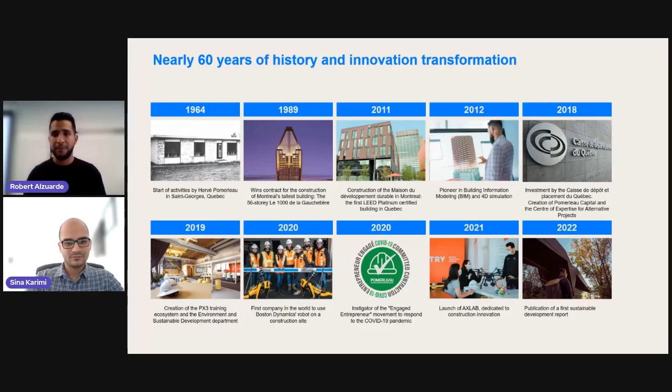Just to give you some metrics: we have around 200 active sites across Canada, 4,000 employees, and around 20,000 people working on our sites. That's why it's so important to have a positive impact and to build those teams as we approach projects.

Presence across Canada, as you can see, with offices not only in Quebec but also in Ontario and BC.

Our expertise is, as you know, buildings, also civil and infrastructure, but we're also proud of our expertise in construction innovation. This happens by organizing 8 different research and development axes, going from artificial intelligence to Internet of Things, planning, reality capture, prefabrication, and obviously robotics, which is also part of the reality capture axis, discussed in one of these series before.

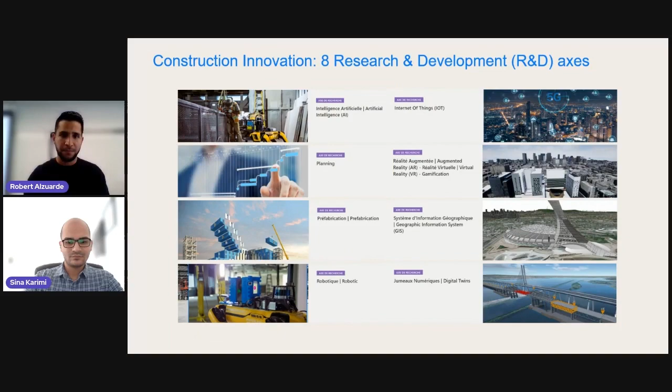Now, this innovation and all these different topics, they have a really unique approach. If we consider the size of the innovation team, we're talking about more than 100 people dedicated to do R&D, BIM implementation, framework analysis. But the implementation is not limited to those people. The innovation happens hand by hand with the operation teams.

So we divide now our framework in 2 parts. The R&D, it's led by the new acceleration lab, and then we have a team that is focused on the deployment. This team we call the Foundation for Operational Excellence. This is where we really structure how things are going to be applied on projects and how we can scale those benefits.

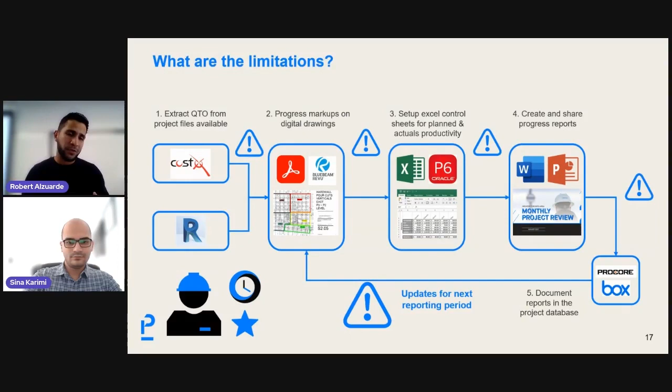Then you also have a disconnection with that master Excel database, and the reporting part is just a nightmare to really update, and not only does it take a long time to do that, but it also reduces maybe the quality of that process over time.

Now, is there a better way? That was the question that we put on the table when we started talking about this. Is there a way to really reduce the number of platforms, reduce those silos of content and unconnected data, and have just one database that merges all this information and one reporting tool.

That is not only able to report, but is also able to use some analytics and smart data connections. So we approached this by exploring some of the mature technologies available in the market. One of them is Assemble, and the other one is Power BI.

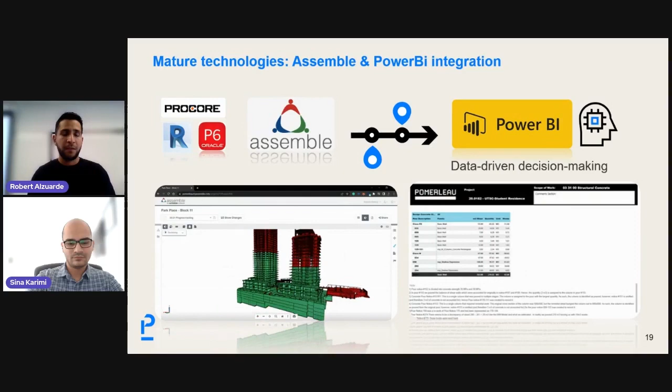With Assemble, we were able to connect the data coming from the BIM models, from P6, and even some data from Procore, like crew sizes and crew logs. So that data is now centralized in one place, and the reporting part is just a matter of extracting and selecting different data sets and organizing them in a way that enables data-driven decision making.

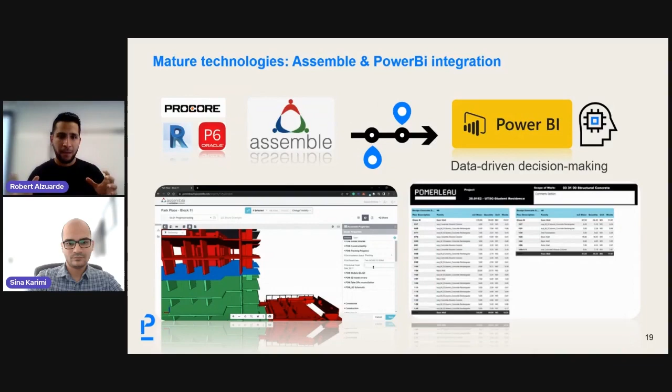So that's the path we followed to start deploying this initiative. In terms of deployment, we'll refer now to the project we're going to present today. We actually used this strategy in four projects in parallel as an initial pilot phase, because we wanted to compare similarities, but also differences between these projects.

The University of Toronto Student Residence is a design-build project. It's also a passive house project, which will be one of the most energy efficient buildings in Canada. It's around 25,000 square meters of surface area, and it's going to host 746 units for students at the University of Toronto Scarborough campus.

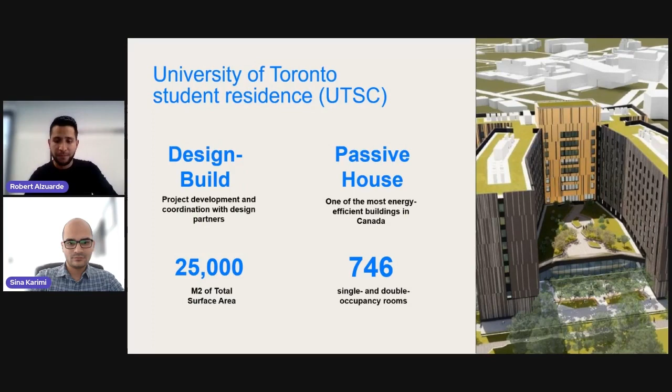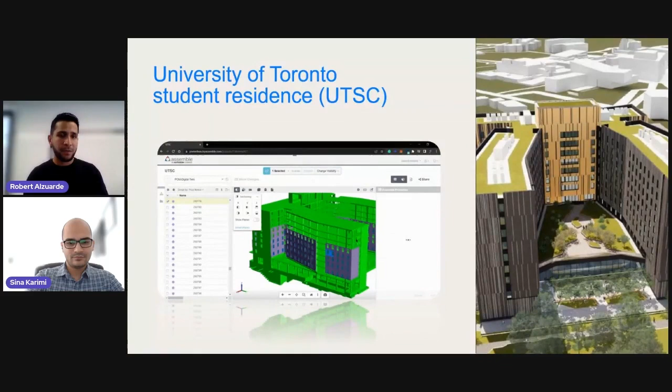With a project of this nature, we had many opportunities to explore how we can really provide this one platform and analytics tools to enable decision making and open new possibilities for the management of the project.

So I'm going to describe three specific uses of the DPT, digital progress tracking process. One is productivity tracking. The second is to understand the implications and effects of manpower. The third is about exploring not only productivity in terms of time, but also in terms of cost and conversion to unit prices.

For the first part, productivity tracking, we had a solution for taking a BIM model meant for design purposes, with a breakdown based on elements and families and typical Revit structure. We're now able to add and condition this model with information about the master format, division code, and the P6 activity IDs related to the elements in the model.

That is the first step, the key step, so we can start mapping the work breakdown structure, which is different in design versus construction. The second part of this equation is to have on-site installation status inputs from the team members, mainly the installation status and the completion date.

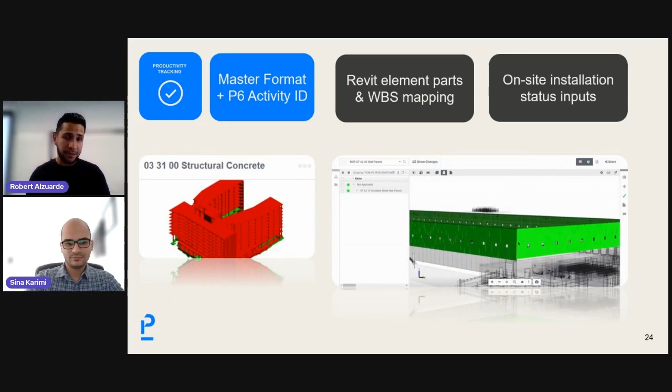That was the main step, the first approach. So we now had models that are split with master format codes, but we also wanted to understand the implications, as I mentioned before, about crew sizes.

With Power BI, we can also start linking and reading information available through Procore, and by having the number of hours each subcontractor registers on our projects, we can understand the curves of crew sizes, when that curve is increasing or decreasing, because they're almost done with their scope of work.

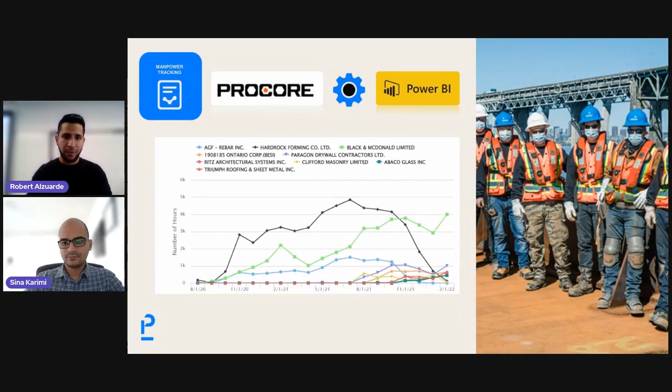With the two combined, we can really enable new potential for project managers and directors to understand the relationship between productivity and manpower. What you see there is one of the many different graphs and analyses we started to explore and extract from linking the models for this project with the data we wanted to add.

So here you can see two curves: one about productivity and one about crew size analysis. As you can see, they have a correlation, and this is not historical data used just to confirm and make it obvious that crew size affects productivity.

It's also a solution that can let you identify early flags, concerns, and problems, and this is exactly what happened in this project. I have many quotes and feedback from the actual project managers and directors, but let me just read some of them.

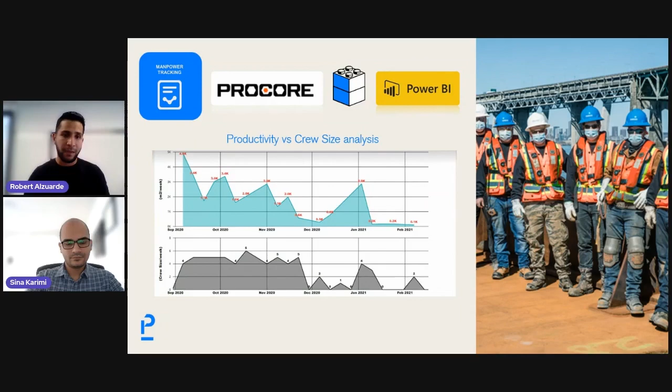By having these curves, we're able to increase and decrease the crew as required to ensure that we are still maintaining a schedule during the same month that we're working in. So right now, every project that has this process in place can make those decisions and identify those early flags. You don't have to wait until the productivity is too low to call the subcontractor and say, hey, we need to increase the crew size, we need to work on weekends. You can have this big picture and comprehensive picture of what's happening in the projects by merging the BIM data and the progress tracking data.

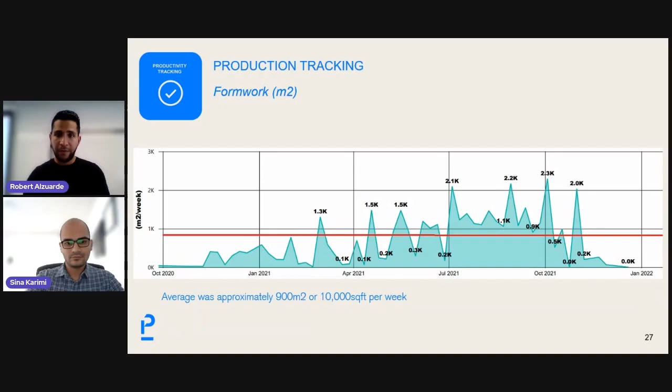Another example here of the value of these two projects. We have, in this case, formwork. I'm tracking the production of the formwork. So now we can see what is the average and how that average is also affected by productivity in terms of hours per square meter.

This is also a correlation, but in this case it's opposite. The higher the number, that means there is more hours spent completing the same scope of work. As we went through the initial levels of the building, like the foundations, we started to reduce the number. We started to be more efficient, and we were able to get these records not only for this project, but now we start thinking about a database of projects, how we can use this productivity for similar projects.

Hopefully that's a clear example. This one is also another approach of how we can use the data from the models to compare plan productivities from a baseline schedule, updated schedule, and the actual productivity.

The three curves that you see there, the gray one is for the plan. The baseline schedule had some deadlines to complete certain quantities of the structural concrete. The blue cyan curve shows the actual, and because there were changes and COVID affectations for this project, there was a revised schedule that you can compare with the actuals. So instead of trying to gather data from markups, PDF, or Excel tables, now you have the data linked and giving you the information you need to ensure the project is on track and on schedule.

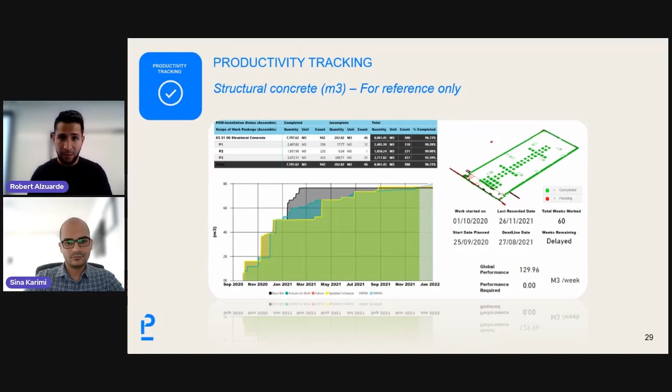Now, a different exploration, more related to unit conversion to unit prices. Now we have productivities coming from the sites, actual productivities. How we can use this to understand the overall unit cost for this scope of work. This was done with the experience and expertise of our project directors, assigning and trying to ballpark some percentage of labor, material, and equipment. In a typical scope of work, that could be maybe 50-50, but it really depends on the scope of work. For example, formwork, the percentage of labor versus equipment and material is around 40%.

So we can use the actual productivity to estimate and compare unit costs to the base estimates and the base budget for the project. This again is enabling data-driven decision making. It's giving you information early in the project instead of having to wait and increase the cost of adjusting and making a decision.

Another example here is production tracking for the masonry, where we also divided different milestones, like the installation, the drywall, and just by linking that and isolating the model in different views, we can have a planning methodology to make sure we understand the progress on different areas of the building.

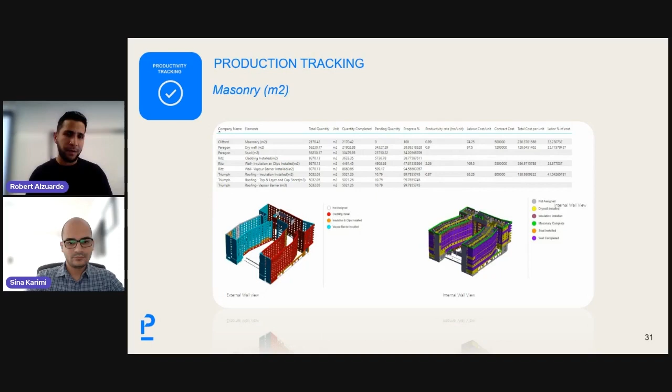So we did all this to really put this initiative, this idea, in place. And out of that we extracted some lessons learned and requirements to make sure that the digital progress tracking process works efficiently. Number one, we need to have BIM models, but models that have the LOD agreed ahead of the project, having those discussions early enough to understand the level of detail we need to make this happen.

We need to collaborate with the project to define the work breakdown structure and the same structure with the schedule, in this case the P6 setup. We also need to have Revit elements that can be broken down into parts. That work happens between the design and construction teams, so we can then map the elements to the specific scope of work.

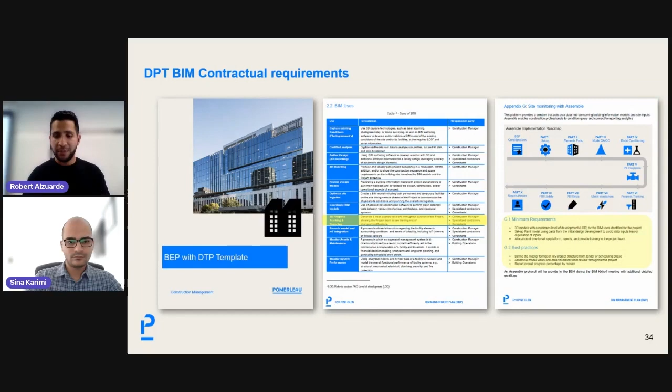Finally, in terms of ROIs, we have some tangible ROIs, like the number of platforms that now we have integrated. We're targeting to have one or two platforms at the most. Right now, it's one platform that reads everything, and then the reporting tool.

In terms of time to create these reports, we have been able to reduce this by more than half. So imagine that something that takes 5 days on a weekly basis is now taking 2 days, and you multiply that for the number of weeks in the project, that is saving resources to focus on more important tasks.

We also have some capabilities to transfer templates between projects, so it's not something that you need to start from scratch every time. Now you can share these templates both in Assemble and Power BI for different projects.

In terms of intangibles, I think, and I hope it's clear, we are basically enabling capabilities for our teams, and right now our teams are salesmen of this process. They have that vision now that all the data that is tracked in one project is not only going to benefit that project, it's going to help to estimate and plan projects way more efficiently and with a better knowledge in the future. So that is one intangible KPI that we received some feedback on.

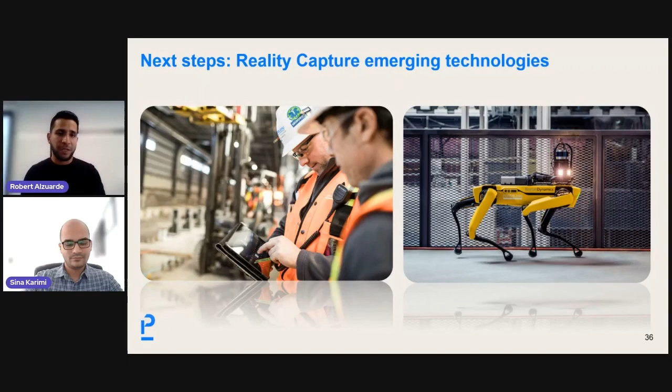For the next part and the next steps of this process, I'm going to pass it to Sina, where he's going to explain a little bit more of the emerging technologies for reality capture and how this can benefit our projects as well. So back to you, Sina.

Thank you, Robert. Thank you for sharing this project story. Now that we have shared our story for digitally tracking the progress of a project,

Now we are focusing on bringing this to the next level, which is robotic reality capture. And for that, I'd like to start with a broad and brief overview of the reality capture opportunity that we have in the construction industry.

Our R&D team is focused on using automation with robotics, trying to help with the problem to effectively monitor and manage job sites. That level of comprehensive site visibility requires an unprecedented amount of reality capture and site data. As Robert said, we are working on DPT, so we require data from the site.

This reality could be captured in different ways, which requires various sensors. And in addition, the frequency of captures is important, as the visibility of the site requires consistent reality capture.

So I'd like to start with a question before going any deeper into how we use robotics at Pomerleau. Why can it be useful to use robots for reality capture on a construction site? Basically, the work is dull and difficult for a human.

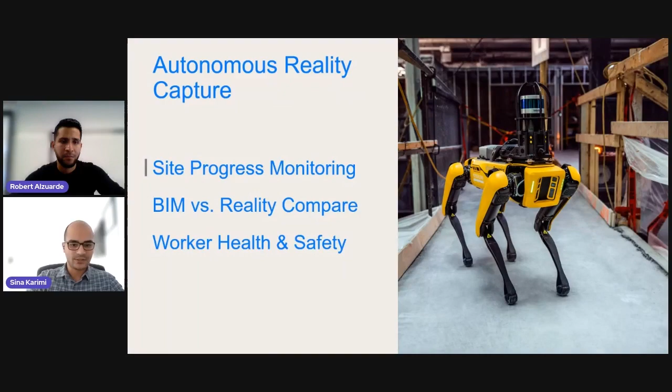Also, we have many projects working and coordinating in 3D in BIM. The project team wants to be able to compare as-built to the model. There are a few ways to do that, and there are very good software tools out there to do it for you. But before that, you need the data to be captured accurately.

As you can see, this is the point cloud generated by Leica RTC 360 with Spot. We've made this integration to use a highly accurate laser scanner with Spot, and in this direction we also superimpose the laser scan onto the model to get the deviation or any potential conflicts we want to catch of the point cloud against the model.

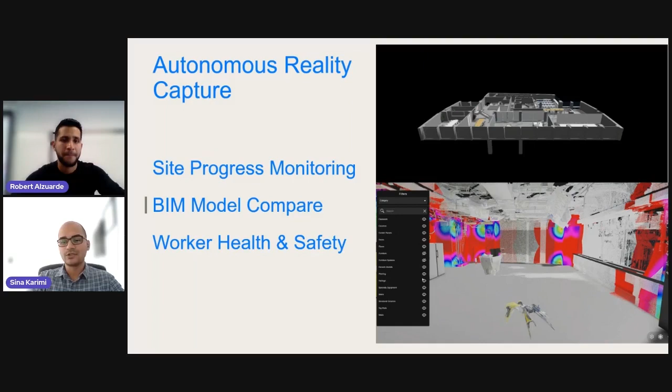We've been able to build a process where we collect point cloud, import it into our software, and visualize the deviation from model. Then we can see if an element is installed, is it installed in the right location, and are there any conflicts? This is critical as it allows our projects to quantify the work and start to come up with a metric by which all stakeholders can agree upon in terms of indicating completion.

I cannot emphasize enough that first and foremost, the robot gives an opportunity to remove workers from potentially hazardous situations. Think of confined spaces, but also think of spaces where it is easy to trip. Again, think of pre-pour decking where some kind of injuries could happen. We don't risk a person to do that level of reality capture in that kind of terrain.

Also, autonomous reality capture presents opportunity for everyone involved in the project. Nearly real-time data capture impacts nearly every aspect of the project process, including estimating, bidding, construction, completing, and also verifying the project. It reduces fees for all the site investigation that have to be done to verify the site conditions. And these are the opportunities for our clients: we can provide them with accurate as-builts and also enhanced digital models.

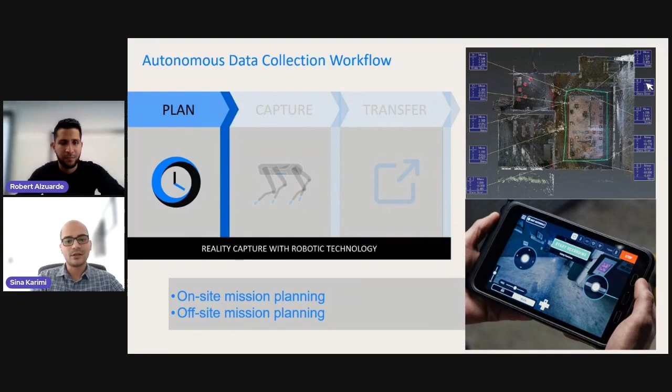You can see an example on the lower right with the Boston Dynamics tablet. Also on the upper right, we are able to do offsite mission planning, where if we have a previously taken point cloud, BIM, or CAD model, we can import it into our software ecosystem, pre-plan the path for the robot to direct him for the reality capture, and then when the robot is done, it's going to push the data to the cloud.

The robot is equipped with smart perception of the environment, to understand whether there is an obstacle, choose a route around it, and come back to the initial path.

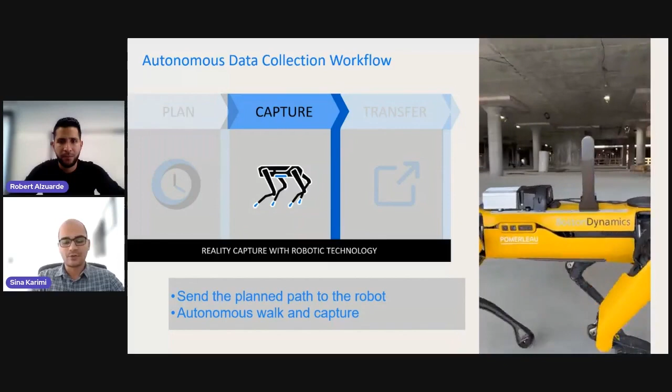Spot and its sensors capture reality, various data such as laser scans, 360 images, thermal images, etc. It's really based on the application we want to focus on and what we want to do with the data. As you see here, Spot is on an autonomous mission capturing laser scan and 360 images simultaneously. By having Spot, we can capture different kinds of data all at the same time, so we increase efficiency in terms of automation.

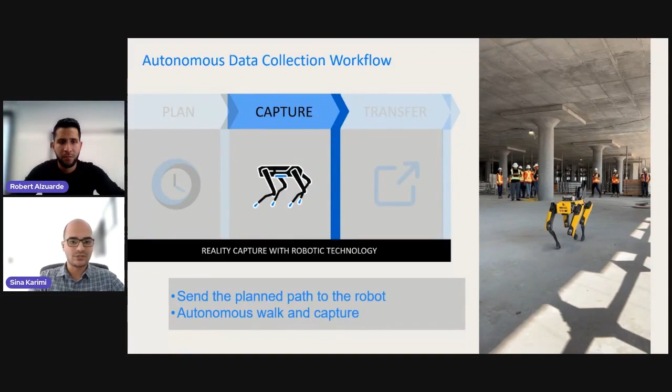Oftentimes, the people running the analysis on the data are remote. They are offsite, not part of the reality capture team on site. So transferring the data to a remote location increases the reality capture efficiency.

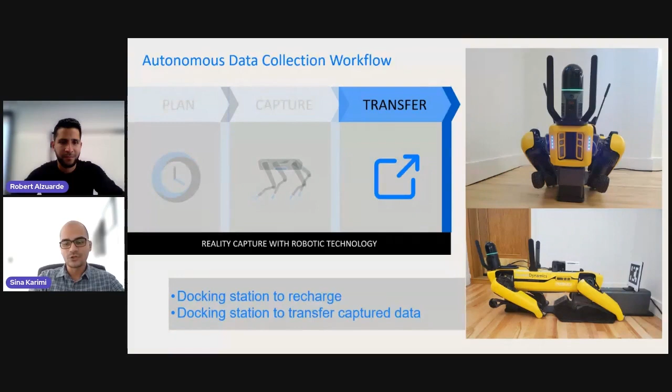As the robot is recharging, it sends the large files of data, such as 360 images and laser scan point clouds, to the cloud, all as part of the autonomous mission. There is no human interruption. The person on the other side might not even know that there is a robot on the job site taking care of the reality capture and sending the data to them. All they know is that they are getting the reality capture regularly in near real time, meaning they will be able to generate more value for the project.

In this case, we are helping our project team put their time and energy into resolving the issues. With robotic reality capture, we help our project team find the issues quickly so they can resolve them.

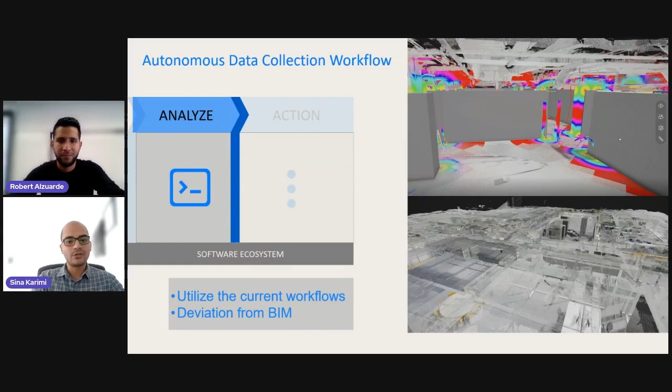Before we go any further about how we actually use Spot, I want to get your attention on how we can configure Spot with different payloads on it to capture different types of data. Spot automates our on-site data capture, and by virtue of that level of repeatability, we are able to increase the frequency of data capture.

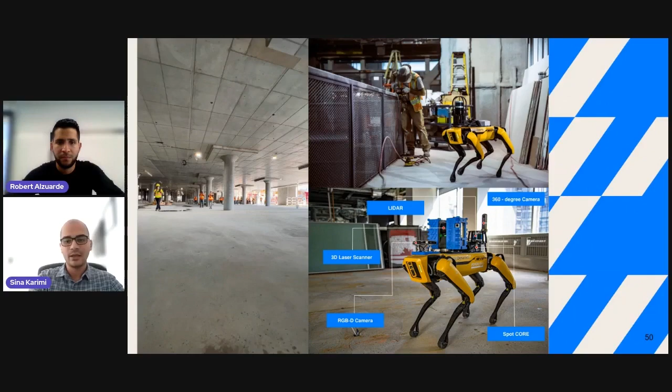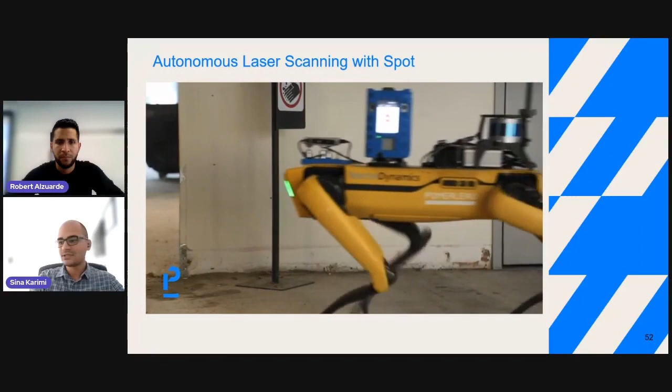So now let's have a look at how Spot actually captures data on our job site. This is one of our projects where we automate laser scanning with Spot, and this project was submitted to previously known CAN-BIM, now Building Transformation. We are excited that we won an award for this application.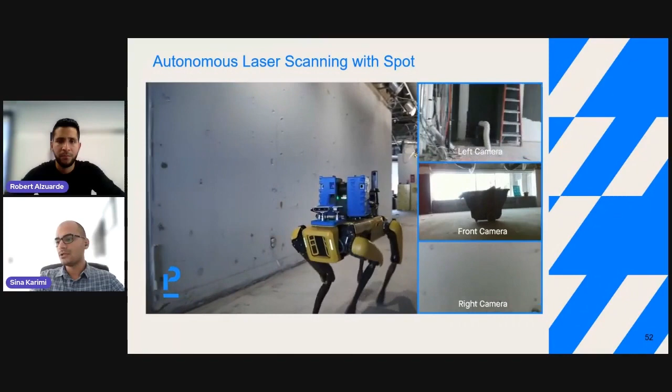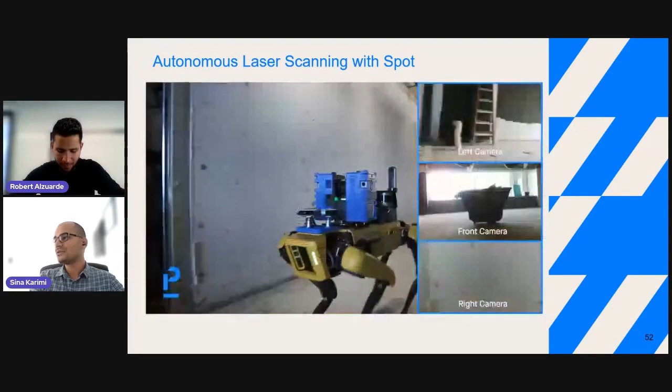As you can see, Spot is on an autonomous mission. There is no human interruption. Spot is equipped with different sensors, RGBD cameras to capture images, 3D laser scan, and 360 images. We want Spot to go to a specific location, stop there, and capture the data for us.

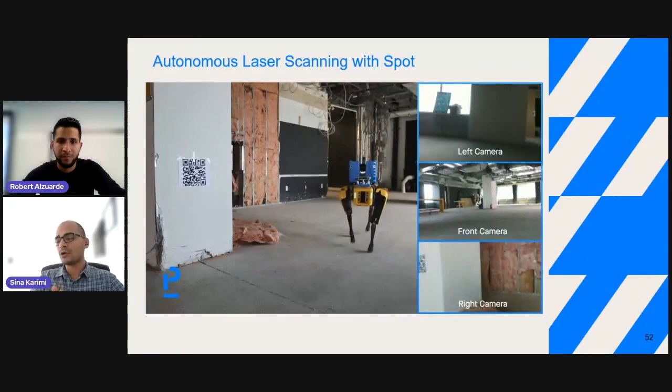For this specific application, we mark the location with a QR code. Spot is equipped with AI algorithms to detect the barcode and stabilize itself so that we have less noise in our point clouds, then sends a command to the RTC 360 to collect data for us. This is all done as part of an autonomous mission.

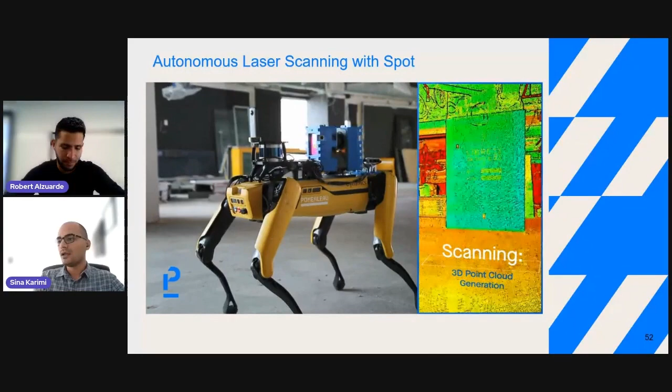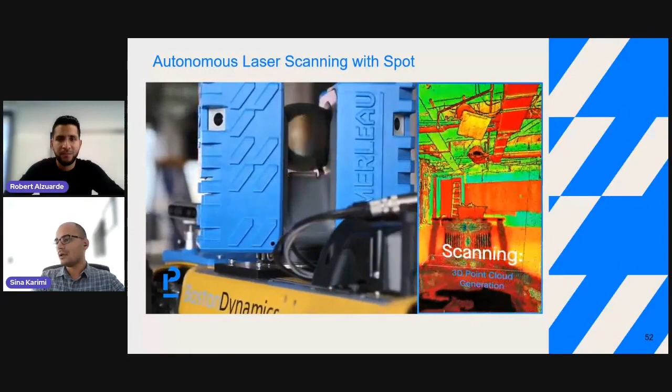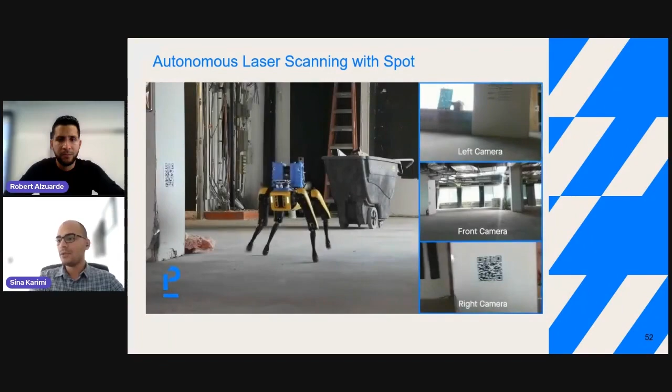As you can see, the integration is done. Spot has awareness of what the laser scanner is doing, and when it's done, it sends the command back to Spot to go to the next location. The RTC is collecting the point cloud and generating it with HD images that are used to create a colorized point cloud. When the scan is completed, the robot continues the autonomous mission to the next point.

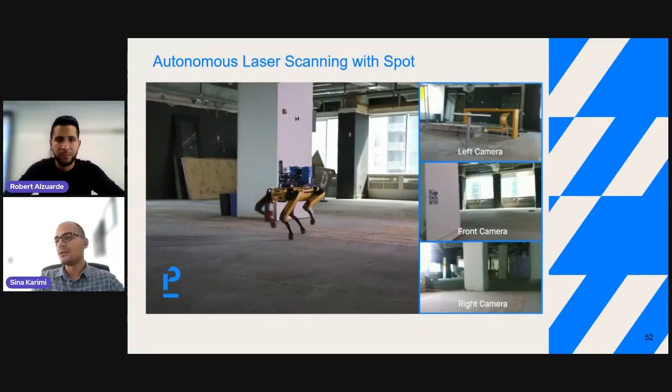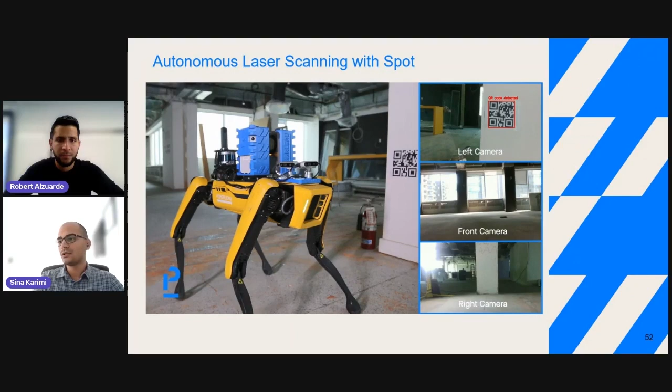This repeatability can be done as many times as we desire, there is no limitation for that. Well, of course the limitation could be the battery on the robot, which is on average 90 minutes. This provides us with a good amount of duration to capture reality, probably once a week or once a month, depending on the type of project and application we are collecting data for. Just imagine how effective this process is when we automate it using a robot.

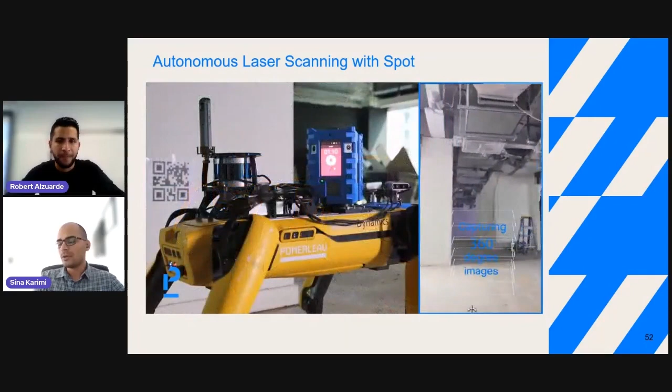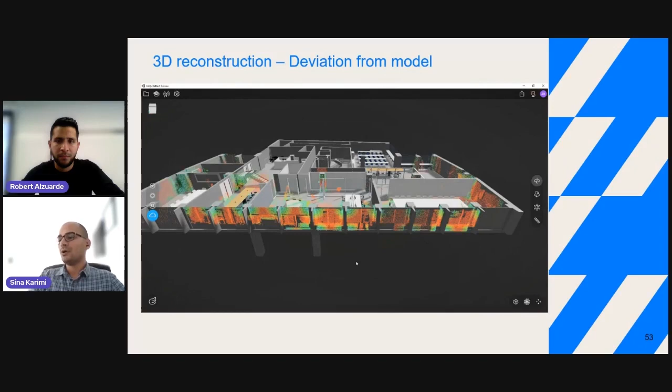So the next project we use in Pomerleau is 3D reconstruction, where we get the deviation from the model. In the previous slide you saw how the capture actually happened, and when we got the laser scan, we imposed and aligned it to our BIM model, and we get the deviation.

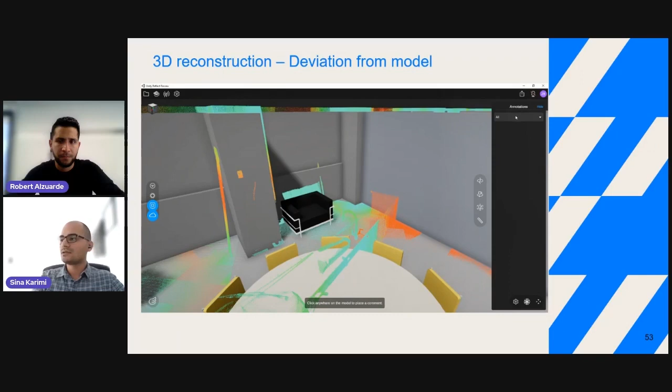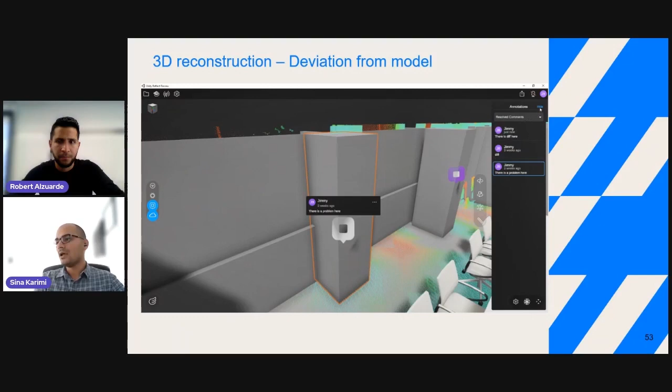This is a collaborative tool. If we want to leave notes for our project team, we can do that, and we can also assign issues for the project team. For this specific project, since it was going well, we didn't have any issues, so we just played with the point cloud for the sake of this presentation.

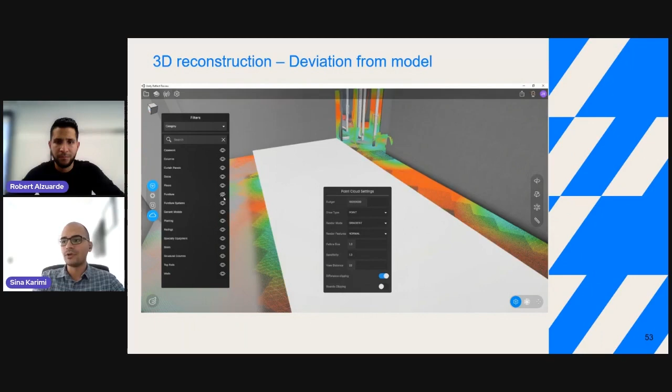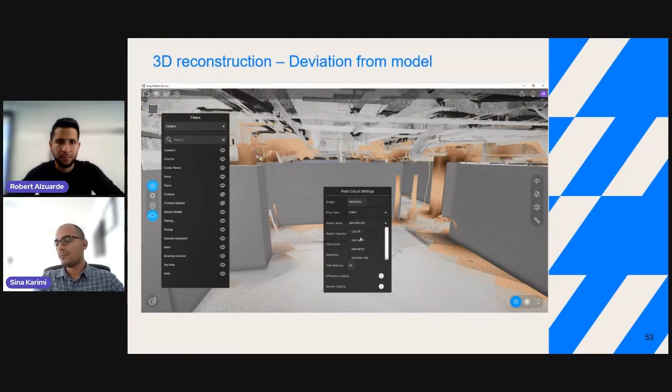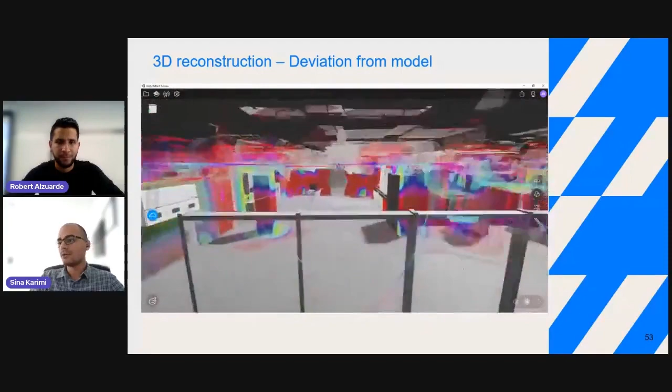Maybe you've worked with point clouds - the number of points is huge, sometimes it goes over 100 million points for a small project, so the computer would have a hard time handling all those points. We created a budget to stream points into the model, and we have different render modes for better visualization. We can move around the model, and the point cloud continues streaming into the model so we're able to use it more effectively, instead of waiting for the computer to process the whole point cloud.

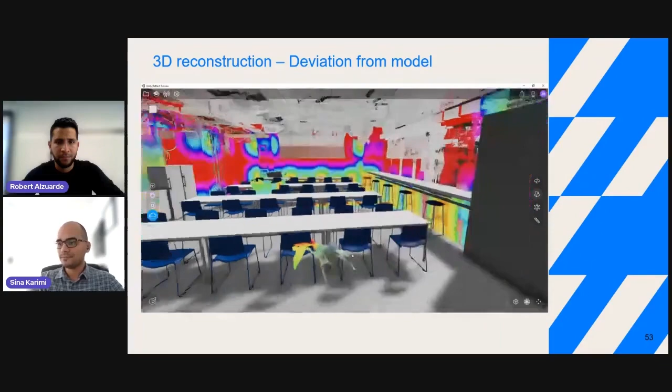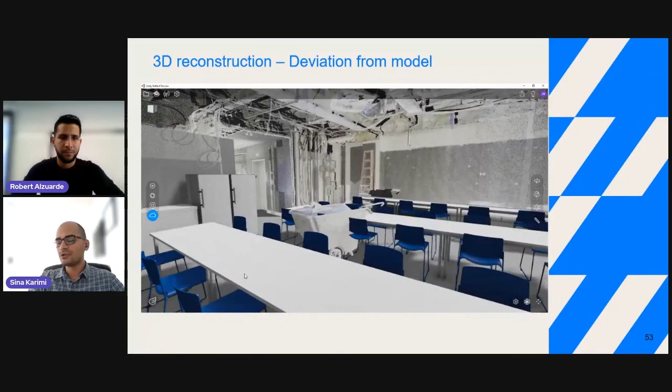This application also lets us work with different tools that we imported from our BIM model.

The other application we have for reality capture, to provide data for data-driven decision making, is remote access to our fleet of robots. It's our robotic command center, and it includes all our robots at Pomerleau. With this application, we have remote access to the fleet of robots, and this includes Spot.

With this, we don't need to step on remote or dangerous sites. If there's a site that is remote and takes a long time to get to, we have Spot there, so we can have remote access to Spot for reality capture. Also for dangerous sites, we don't want to keep range with the robot while operating it. We can stay out of the dangerous environment, operate the robot, and the robot can collect data for us. With this application, we aim to teleoperate and review data in real time as we capture.

And this is actually happening in real time - we don't need to wait for the data to be transferred before having a look at it. This application also supports collaboration and democratization of access to our fleet of robots.

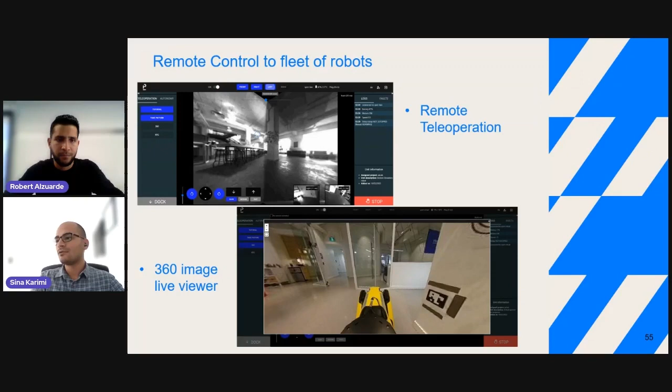These are two screenshots of the application we are seeing here. We have a live 360 image viewer, so if there is any danger, we can see it live and plan to remove the danger from existence. We also have different safety features for the remote access to our fleet of robots.

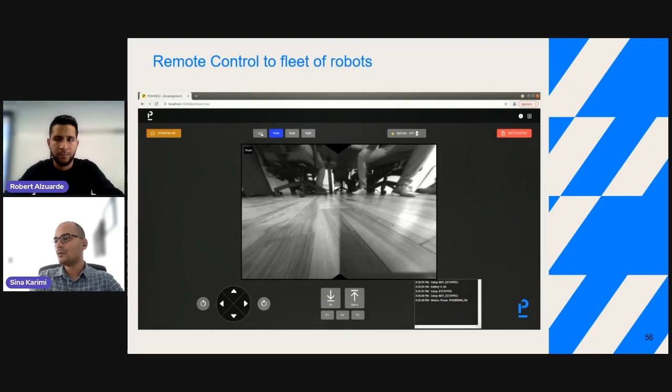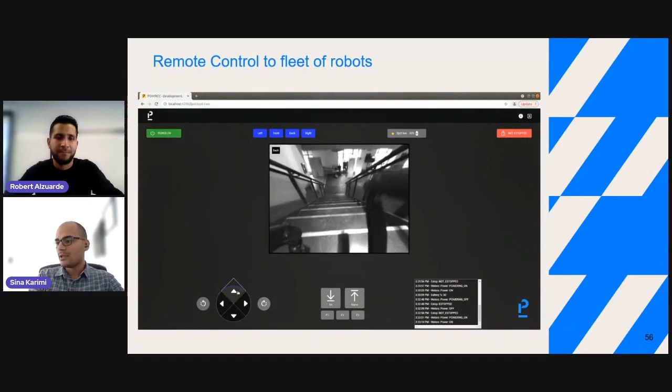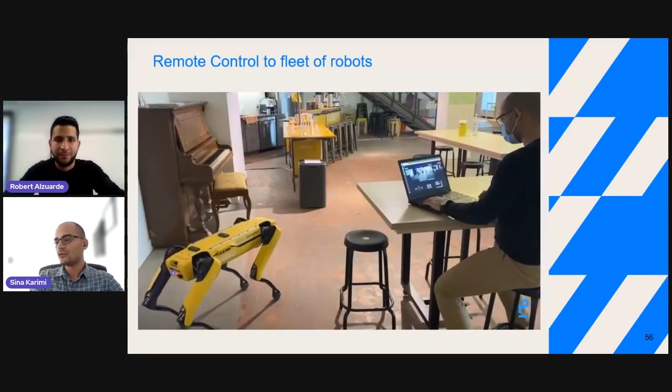As you can see in this slide, this is a demo of how this remote access actually works. We have different sets of cameras around the robot, so we can see what's going on in dangerous environments. And if there are any obstacles or stairs, Spot is very adaptive to stairs, so we can continue to review our site conditions live with less limitations.

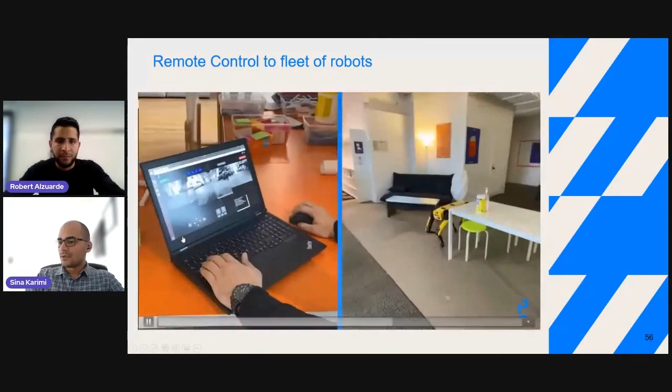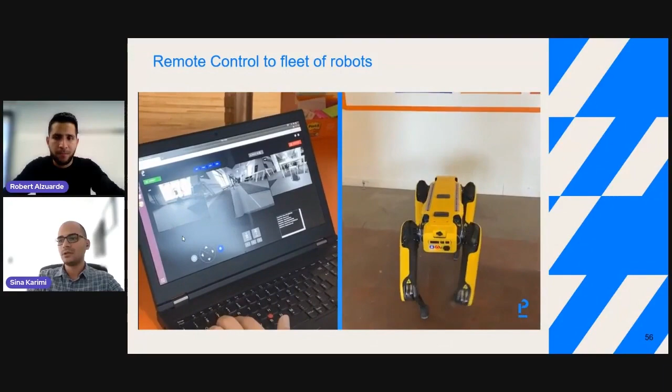This is a cloud-based application that we can use with any tool we have. It could be a laptop, a smartphone, a tablet. So there's going to be less limitation for the use of the robots on the job site.

At the end, I'd like to share our robotic vision with you. SLAM stands for simultaneous localization and mapping, which is the pillar of robotic applications. We'd like to leverage this technology for as-built documentation, and we've also planned to use IoT sensors with a dynamic tool like Spot for other types of data collection. By this, we can have better documentation of our job site, and we can also enable augmented reality applications. This could all take place from design to construction and operation phases of a construction project.

So back to you, Robert, if you'd like to share your opinion, and maybe Thomas. I'll pass it to Tom.

Excellent presentation, guys. Really amazing stuff, and really polished, great content. We really appreciate the effort that went into this. Just want to encourage everyone in the audience, if you've got questions, off on the side there's a panel where you can throw some questions in. I'll try to stick handle them.